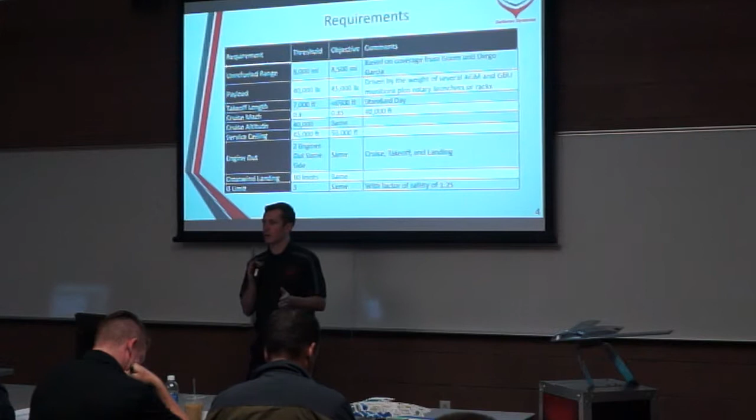I forgot to mention, the threshold values are our minimally compliant values, and the objective values are kind of goals that we wanted to achieve. So for unrefueled range, we wanted 8,000 miles, based on coverage from Guam and Diego Garcia. Payload of 40,000 pounds, driven by several of our payload packages and the rotary launchers and racks. The takeoff length of 7,000 feet was supposed to be comparable to the B-2, so we were operating from the same airfields as the B-2 currently operates from. The cruise Mach at 0.8, a cruise altitude of 40,000 feet, a service ceiling of 45,000 feet, and because we are a nuclear capable bomber, we need to handle 2 engines out on the same side and handle crosswind landing of 30 knots and a G limit of 3, and we imposed a factor of safety of 1.25.

We won't really be taking off from those 2 locations that much, so we plan to start off at Whiteman Air Force Base, similar to the B-2, and we would either refuel over Edwards Air Force Base or Hickam Air Force Base in Hawaii, then continue on to Andersen Air Force Base in Guam. From there we could also go to Diego Garcia, but either way we could cover most of our combat area from those 2 points.

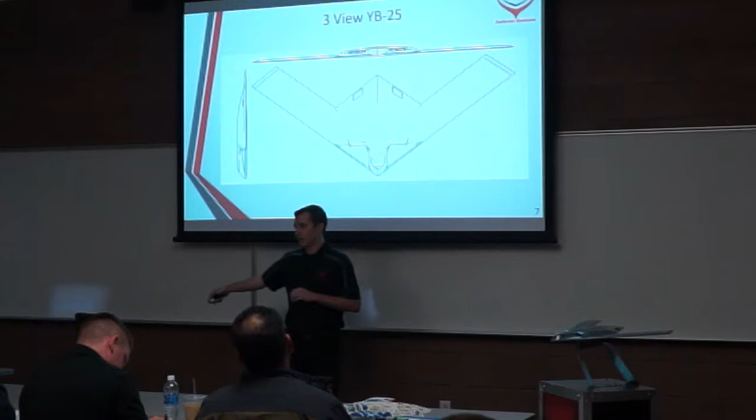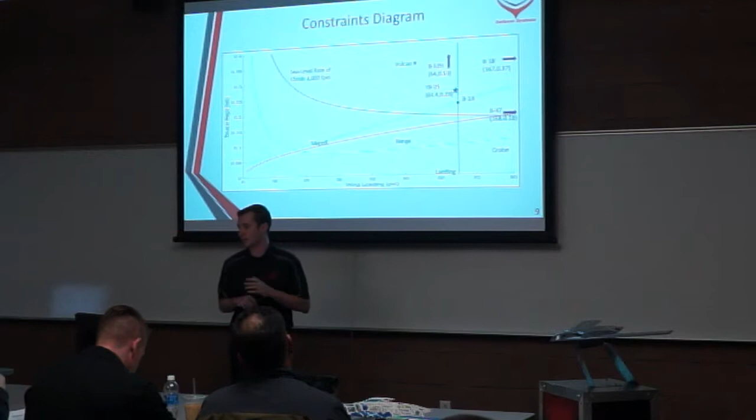This is our constraints diagram, showing how we entered the design phase. As you can see, we're the star there. We are not quite in the design space that we wanted, which was down here, the minimally compliant range. If we had to go through a couple more iterations, we would definitely drive that down. But right now, we're at a wing loading of 64 pounds per square foot and a thrust to weight of 0.28. This is pretty similar to the B-2 and in the same general area as the Vulcan and some of the other comparable aircraft.

And now I'll hand it off to Max for the internal arrangement.

Because we wanted a stealthy design, we don't have any tail structure. To compensate, we have 3 different control surfaces on each side: 2 elevons and a split drag rudder, plus flaps on the edges. For main structural members, the wings are all composites and the main structure is aluminum. We ran a keel down the center for conventional design.

We have 2 bomb bays similar to the B2. We have a ducted engine interface for stealth purposes, to hide the engine face. The cockpit holds 2 pilots, and we have directed energy weapons in case you run into any defenses. Of course you want to be stealthy, but just in case. We also carry other defensive countermeasures such as flares, and fuel takes up basically the rest of the volume.

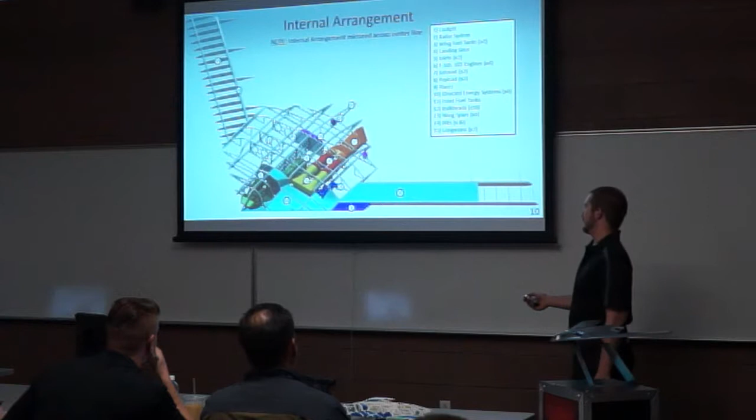And next I'll hand it off to John for low observables. Thanks, Max. So to improve the survivability and effectiveness of the aircraft in the danger zone, we wanted to incorporate some low observable qualities into our aircraft. We did a lot of research on this subject and came up with these rule of thumb ideas.

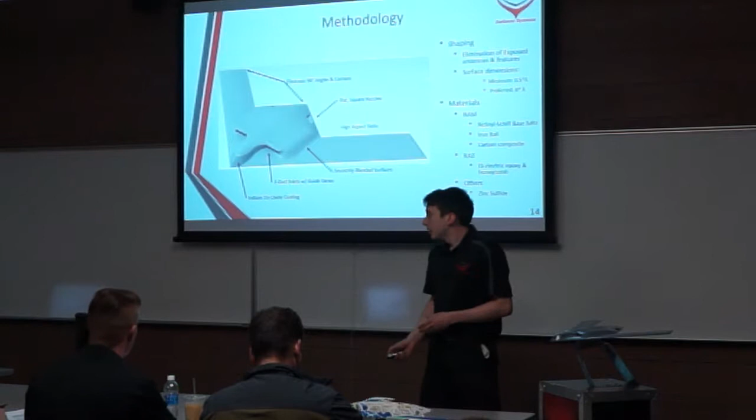We made sure to eliminate all 90-degree angles. We also wanted to provide a really smooth surface so we don't have any surface discontinuities. We masked the inlets to hide the compressor face, and applied a special coating over the cockpit windshield so radar wouldn't penetrate and reflect off the inside of the cockpit.

As far as materials go, we were looking at using RAM and RAS. The RAM would be incorporated into the paint, and the RAS would be part of the structure, modifying the leading edge of the aircraft.

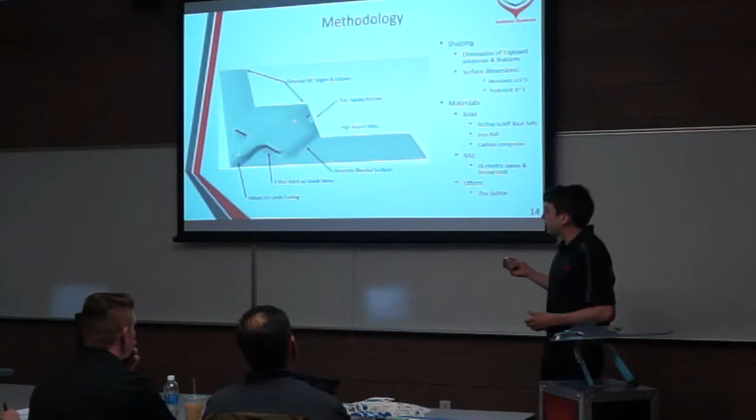For infrared detection, we're using a square nozzle in the back. This should encourage the mixing of hot exhaust air and cold atmospheric air. Additionally, we're looking at using zinc sulfide to force infrared radiation into a wavelength that doesn't transmit as well through the atmosphere.

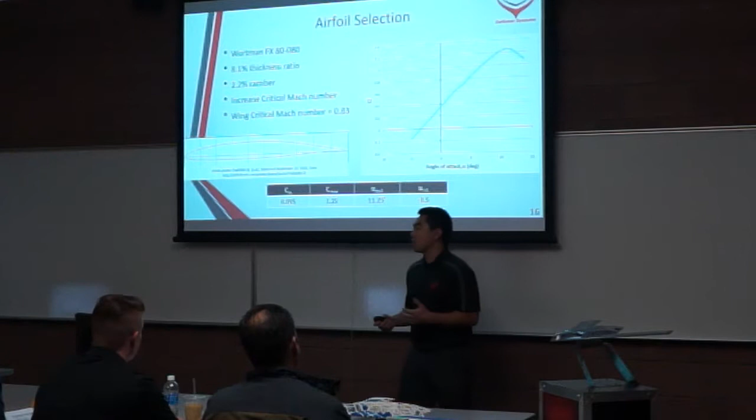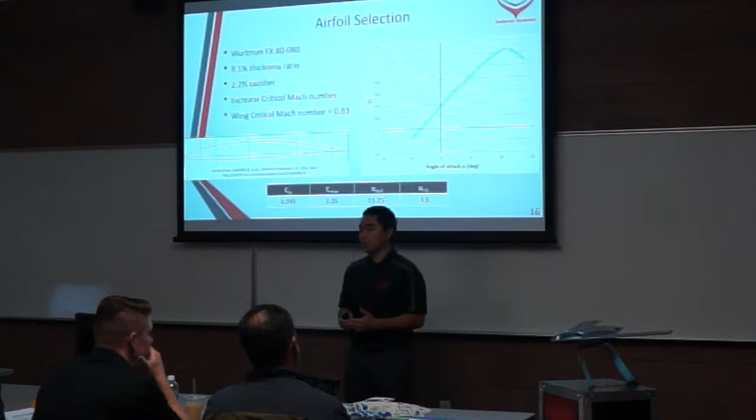And now I will hand it off to Michael to do aerodynamics. Thank you, John. The first thing for aerodynamics was we needed to pick an airfoil that could delay the critical Mach number over the wings as far as possible, as well as give good performance characteristics such as high CL and low CD, and have enough volume in the wings when transferred to 3-dimensional form in order to hold subsystems like fuel and electronics.

Overall, what came up was the Wortmann FX 80-080 airfoil, shown on your left here. This airfoil, with an 8.1% thickness ratio coupled with a 40-degree leading edge sweep, gives our wings a critical Mach number of 0.83. The 2-dimensional data here is derived from XFLR5, using 2-dimensional airfoil tools, and will be converted into 3-dimensional data using Brandt's methods.

Overall, with our clean configuration, the aircraft has a max CL of about 1.2 with a stall angle just above 11 degrees. When the flaps are deployed, the CL max jumps up to just below 1.6 and delays backward to under 10 degrees.

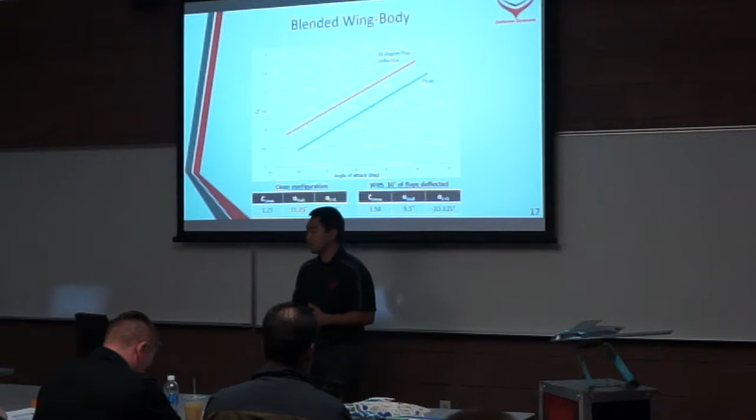In flight, we have sea level and cruise condition at 40,000 feet displayed here for our L over D. Overall, our max L over D for the YB-25 can achieve 23, but our cruise condition, a velocity of Mach 0.8 at 40,000 feet, gives an L over D of just under 23.

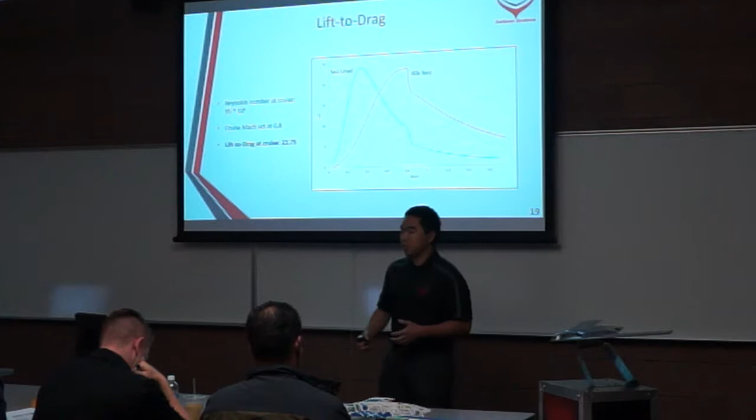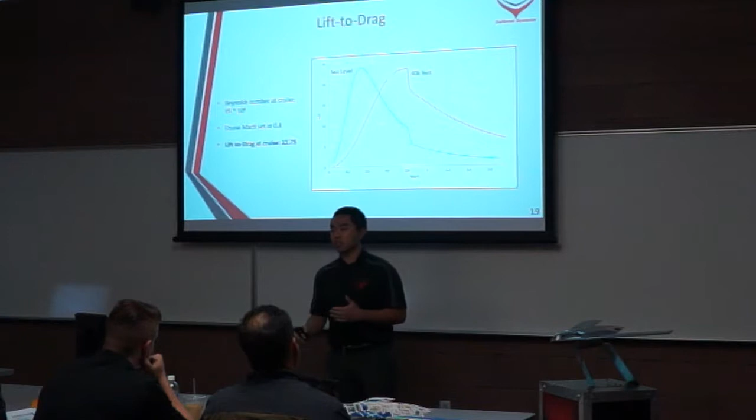I said before that the critical Mach number over the wings is Mach 0.83, but the thickness and length of the body reduces the critical Mach number over the body to just under 0.82. So we set the cruise velocity to 0.8, so that our aircraft does not get into the transonic region and experience any wave drag.

Our Reynolds number in flight is technically 95 million, and that will come into play later when our wind tunnel model is created and tested.

A bunch of us have never really done any blended wing body designs before in our college career, so we had to see if our numbers and assumptions actually made sense and could produce actual values.

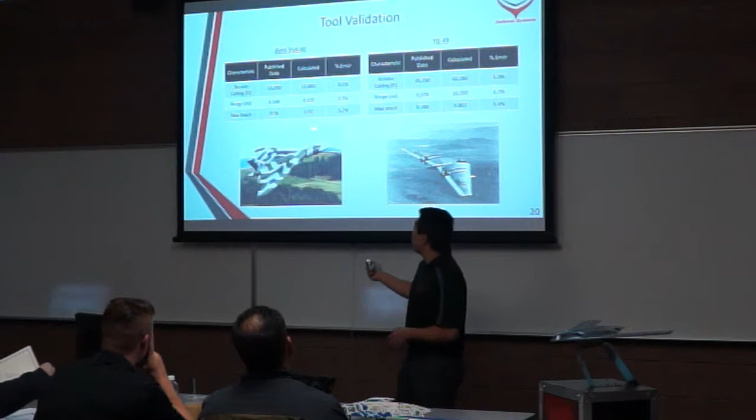So we compared our tool validation to the Avro Vulcan and the YB-49, two fairly blended wing body designs similar to our own, and that information is publicly available. As you can see from both the YB-49 and Avro Vulcan, for the main characteristics we have a max error of just above 5%, which is very acceptable for our calculations.

But first we need to start moving forward, so I'll give it to Josh for propulsion.

We decided to select our engines based on low TSFC and a thrust to weight ratio similar to our comparable aircraft. Using this data, we ended up with the engines shown here on the right.

We excluded high bypass ratio engines because of the S-ducted inlets. They can cause pressure variations that will cause the engine to tear itself apart, which is a bad thing.

So we ended up with these engines from the F-15, the F-16, the B-1, the B-2, the F-22, and the F-35. We considered adding afterburners, doing water injection, and taking off without full fuel weight because we are a fairly heavy aircraft.

But we ended up not really needing any of that because we reduced the weight down at the beginning of this semester.

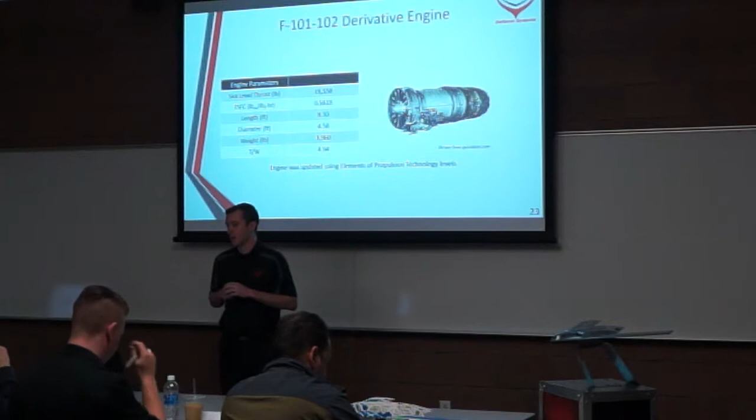So we ended up choosing the F-101, 102, a derivative of it. We updated it with current technology levels, and ended up with a sea level thrust of just under 20,000 pounds and a TSFC of 0.56.

This picture here does include the afterburner. This was removed for our use, and we estimated the new length and weight of the engine based on other engines that don't have afterburners.

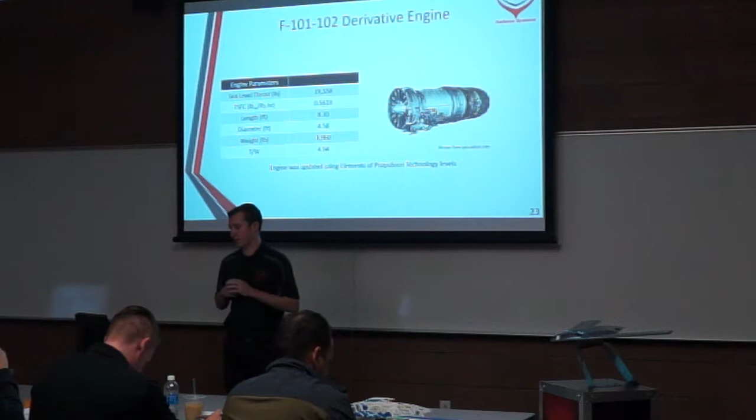From there, we sized the inlet and the diffuser. The inlet was sized using the PERF program, and it was found that we needed just under 10 square feet for our cruise condition, but we upped that to 10 square feet to handle the takeoff and landing conditions a little bit better.

The S-ducting of the diffuser hides the fan face, as John said before. We are going to implement turning vanes to limit the pooling and directionalize the flow a little bit better, and as an added benefit, those will hide the fan face even more, reducing our radar cross-section even more.

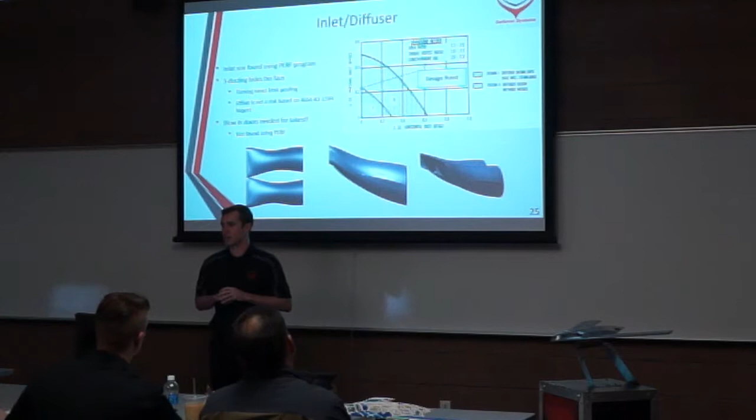The offset is not a risk based on the AIAA paper on diffuser design. As you can see, we're right on the edge of the well-established region of data, so we should be fine, and that's not a risk of the program that we expect to have.

We will need blow-in doors on takeoff, and these were sized using the PERF program as well.

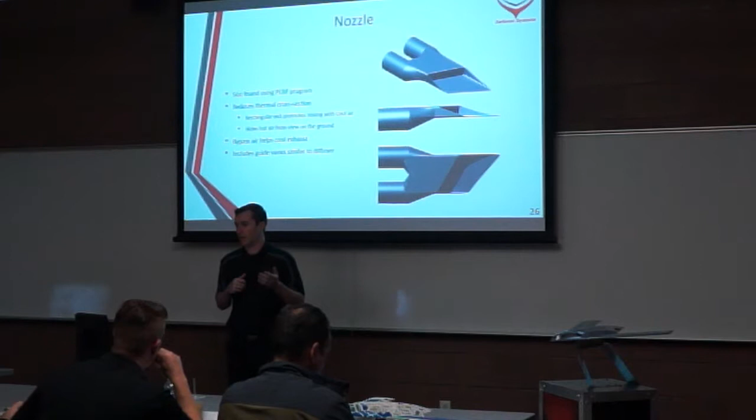The nozzle was again sized using the PERF program and was found to be about 7 square feet per side, or per engine, excuse me. They were designed to be similar to the B2 nozzles to reduce the thermal cross section. They were rectangular to promote mixing with the cool ambient air, and it's on top of the aircraft to hide the hot air from view from the ground. The bypass air from the engine also helps cool the exhaust, which is an added benefit of the turbofan engine. We are also including inlet guide vanes similar to the diffuser on the nozzle, just to help with the pressure recovery in the nozzle. And I will hand it back to Mike for performance.

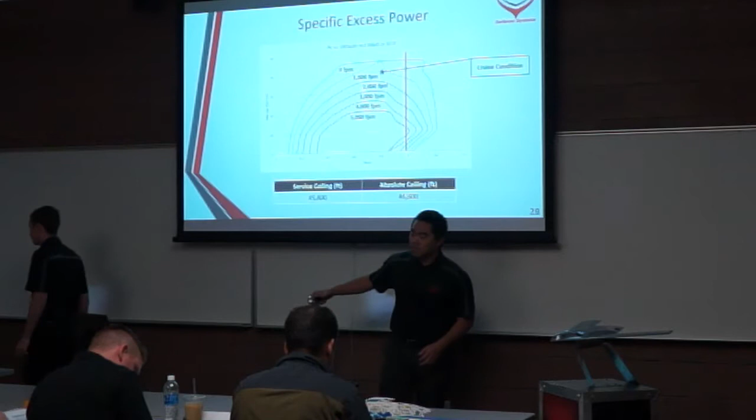Thank you, Josh. Here we have our Ps diagram starting at 5,000 feet per minute, going all the way up to 0 feet per minute. The star denotes our cruise condition there at 40,000 feet and just at Mach 0.8. Our service ceiling overall is just at 45,000 feet, and our absolute ceiling is at 46,600 feet. Our Ps lines do go above Mach 1 as shown there, but when doing these calculations, we did not put into consideration the Q limit and the max forward speed that the aircraft could achieve, which is why the red line is there. That shows the maximum velocity at cruise condition of 40,000 feet.

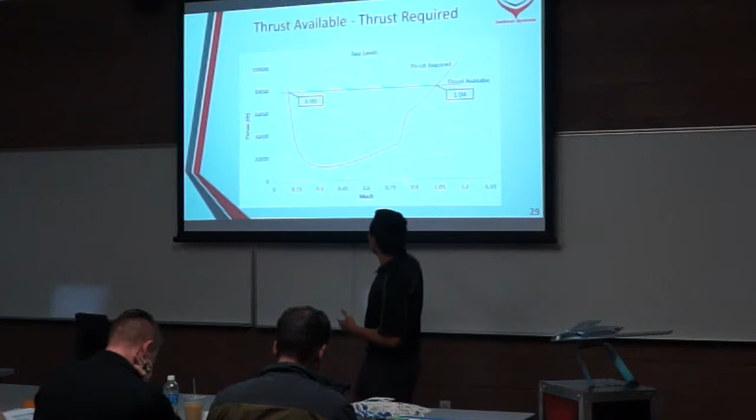Again, with the thrust available, thrust required here, both callouts on the left and the right side here show the minimum velocity and maximum velocity at the current altitude. This one is currently at sea level, and the massive rise here in the thrust required is due to the wave drag over the body.

It should also be noted from all those graphs, the airplane was at full fuel and full payload.

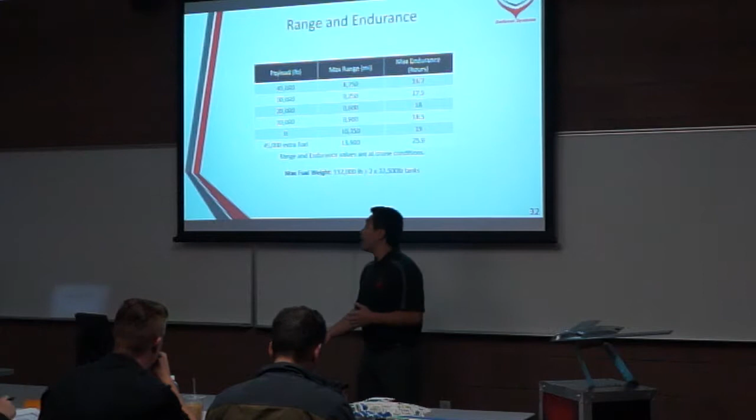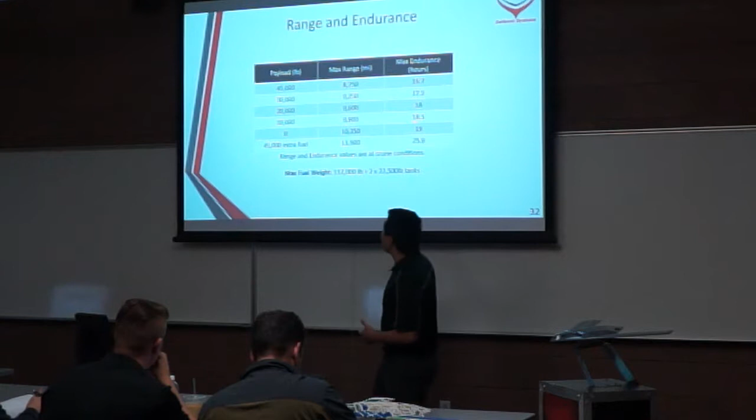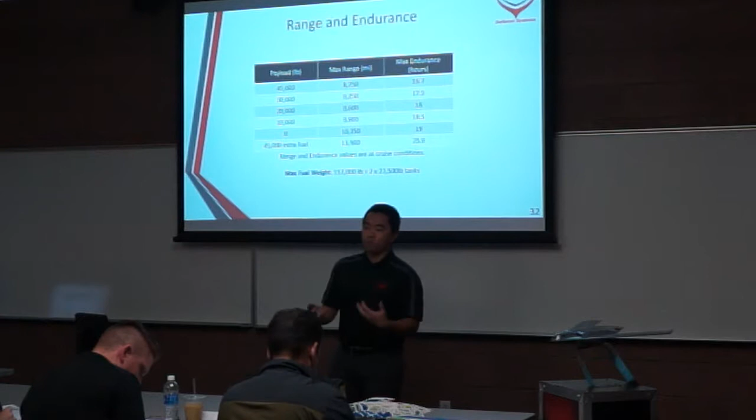So here we have our range and endurance diagrams. There are different payload options here that we have. Of course, as mentioned before, our aircraft can hold a maximum payload of 45,000 pounds. So with that payload and our max fuel, we can have a max range of just under 9,000 miles and an endurance of just below 17 hours. In case our aircraft wants to do more of a reconnaissance or electronic warfare, our payload of 0 in just the bomb bay compartment, our max range goes up to above 10,000 miles and a max endurance of 19 hours. But if there are no bombs in there, we can put external fuel tanks or additional fuel tanks, equaling out the max payload of 45,000 pounds. With that, ultimately, with the extra fuel, we have a max range of just under 14,000 miles and an endurance of under 26 hours. Our aircraft can hold a max fuel weight of 112,000 pounds without the extra fuel tank.

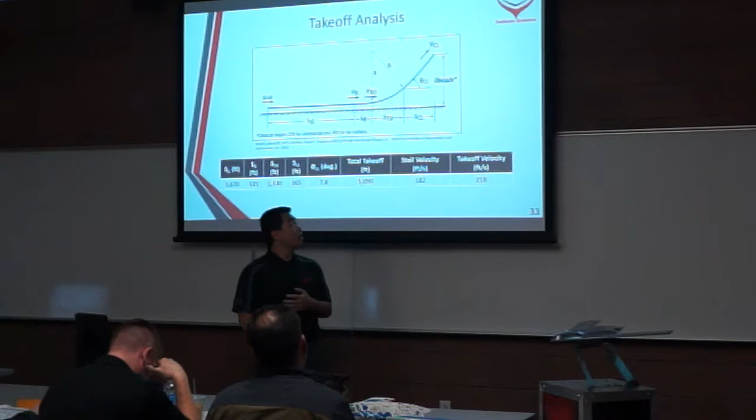So we have to get off the ground first. Using Nicolai's methods, we have our takeoff analysis. He breaks it down into 4 different distances: the ground roll, the transition, the rotation, and the clearance. We are using the standard 50-foot obstacle at the end of the runway for military aircraft, so that is taken into account. They are broken down above me here for their different distances, but overall, on a dry runway with full fuel and full payload, we do have a takeoff distance of just under 5,900 feet, and that is compliant with our total takeoff distance of 6,500.

With full payload and full fuel, our stall velocity goes up to about 182 feet per second, which is just around 110 knots. But using the standard 1.2 factor for takeoff velocity, it brings us up to 220 feet per second, which brings us to about 130 knots.

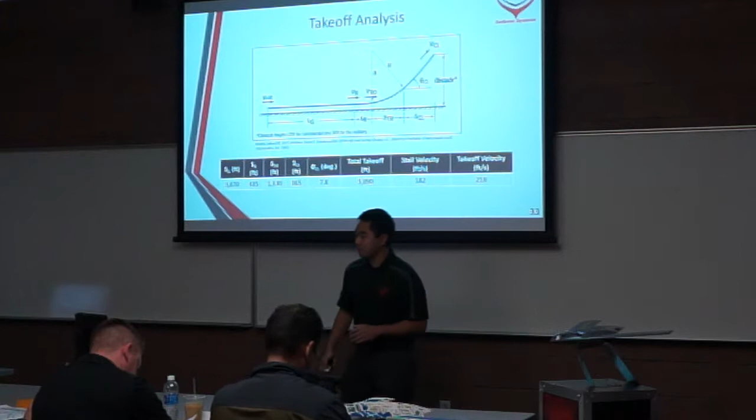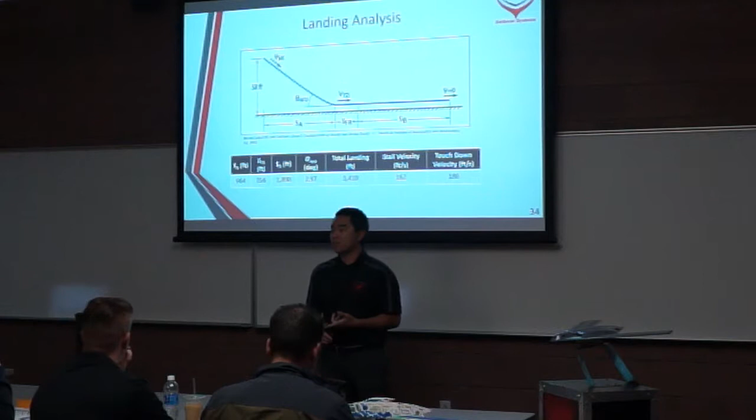So after the mission is over, we have to land, hopefully in one piece. Again, using Nicolai's method, he breaks it up into 3 different distances: the air distance, the free roll, and the braking distance. Once again, they're broken down for you individually at the bottom, but overall, our aircraft has an approach angle of just under 3 degrees and a total landing of 3,400 feet. This is also compliant with our 3,500 feet landing distance.

Nicolai does assume that the aircraft is at half fuel weight, just in case the mission is aborted mid-flight, or that the target area is not at our maximum range. So that is what these calculations are done at. With the half fuel, the stall velocity of the plane with a max payload, in case we didn't drop any, is 162 feet per second, which is about 95 knots. But with the standard 1.15 factor of safety for touchdown velocity, that brings us up to 186 feet per second, about 111 knots.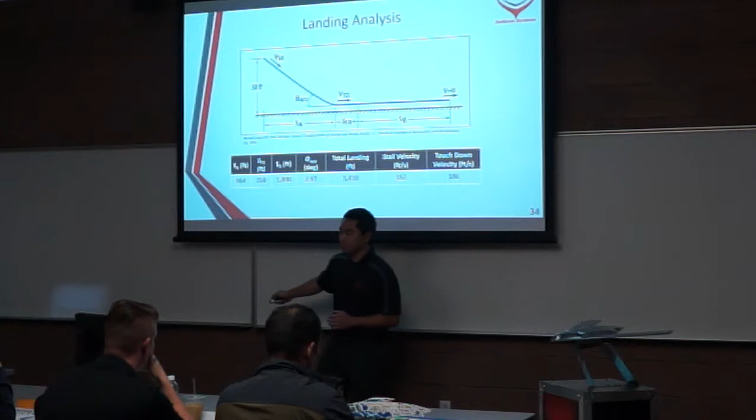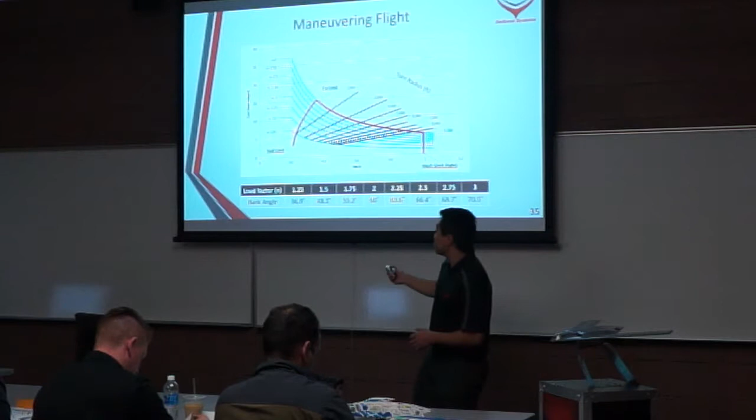This is our maneuvering diagram. The red box here shows what our aircraft is capable of. The top red line is the 3G limit that our aircraft can pull. The right line is the maximum Mach number at cruise of just under Mach 1, 0.98, as mentioned before. And the left is the stall limit, where our aircraft is going too slow with max fuel and max payload, and will begin to fall out of the sky.

But first, to hold all those weights, hand it off to Rhiannon for structures. Thank you, Mike.

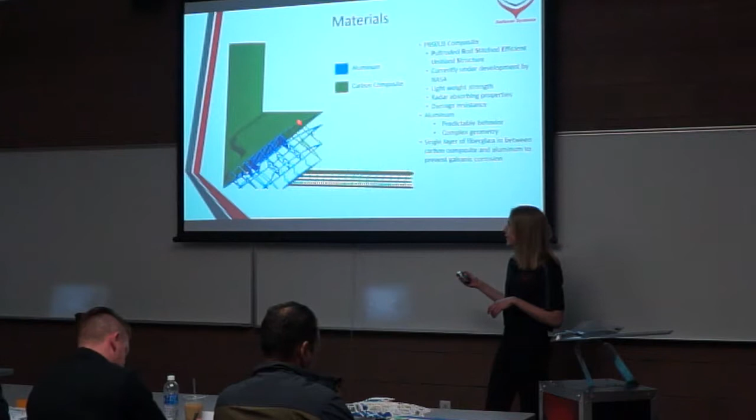For the materials of our aircraft, we chose to use aluminum and carbon composite. Our carbon composite is called the PRSEUS composite and is currently under development by NASA, at about TRL level 6. We chose this due to its lightweight and high strength properties, and radar absorbing properties, especially for the skin. Since the PRSEUS composite is a stitched composite with damage resistant properties, we selected aluminum due to its predictable behavior. Since the body of our aircraft is more complex, carbon wouldn't necessarily be the best choice. In between the aluminum and the carbon composite, we have a single layer of fiberglass to avoid galvanic corrosion.

For our wing design, we have 2 I-beam spars located at 15 and 60% apart. We have 16 ribs located throughout the span of our wing, spaced for control surface sizing. I placed 6 stringers throughout the chord of our wing to reduce our wingtip deflection and apply a lift distribution with 3G loading at a 1.25 factor of safety.

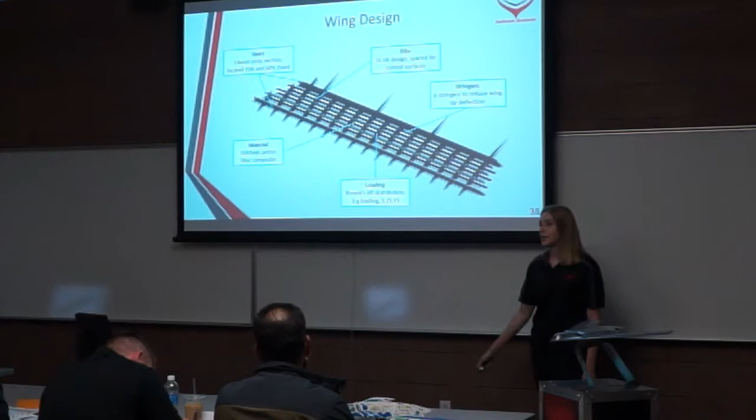For our finite element analysis, I'll start with the boundary condition. I applied a fixed boundary condition at the root and applied Schrenk's lift distribution across the span of the wing at each spar location, along each rib location along the spars of the wing. We achieved a stress singularity in the middle of the wing due to the loading and geometry, but since this is so far away from the root of the wing, which is the actual area of interest, it can be ignored. The max stress achieved at the root of the wing is 161 KSI, which is below our allowable stress and yields a margin of safety of about 8.7%.

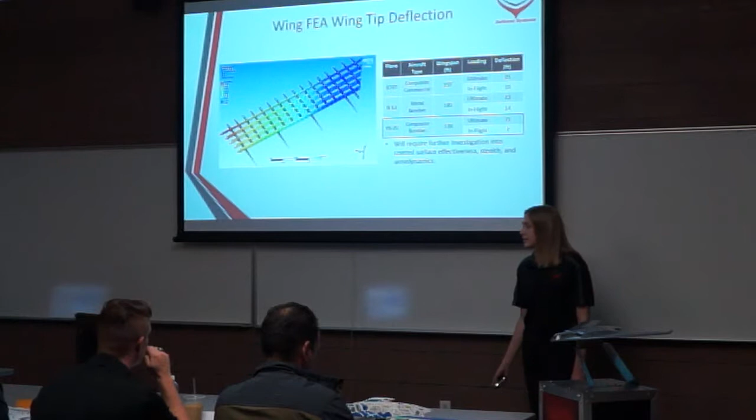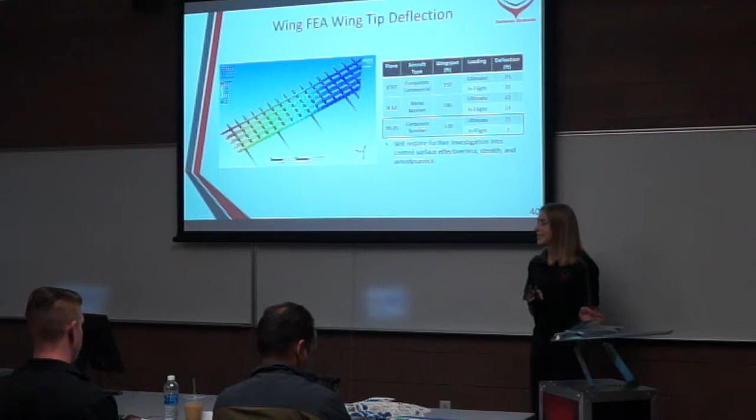For our wingtip deflection, during ultimate loading, our wingtips deflect about 21 feet, and in flight about 7 feet, which sounds like a lot, but compared to commercial composite aircraft and other metal bombers, this is similar. However, this will require a lot more investigation to see how this affects our stealth characteristics, our control surface effectiveness, and aerodynamic characteristics. So that's a topic for further investigation.

For our body design, we also analyzed for 3G loading configurations. Our frames are spaced for our bomb bay and our engine placement. The bomb bay within the frame is 6 feet by 6 feet and 21 feet long, and can hold 45,000 pounds. We performed gust loading analysis and determined that at lower altitudes it does not affect our flight envelope, and at our 40,000 foot altitude it doesn't exceed our 3G design limit, so gust loading wasn't a factor in our analysis.

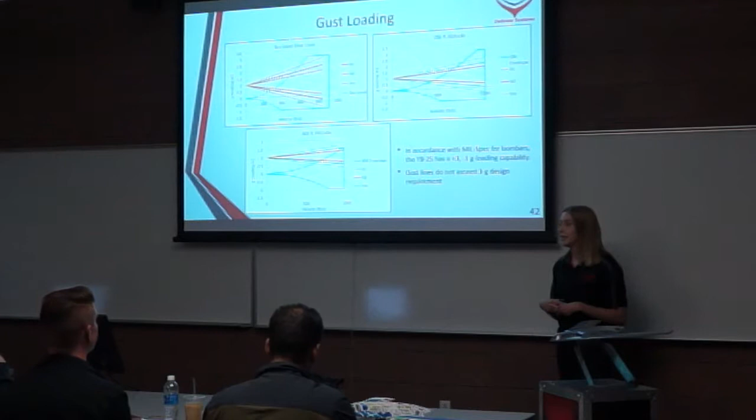And now I'll pass it out to Kate for subsystem or subscale model. Thank you, Rhiannon.

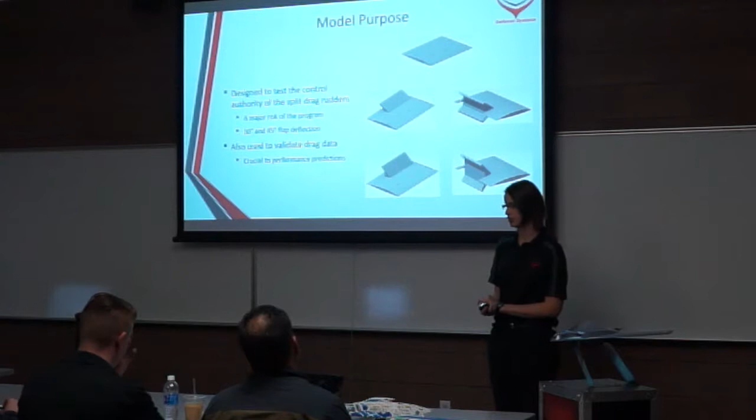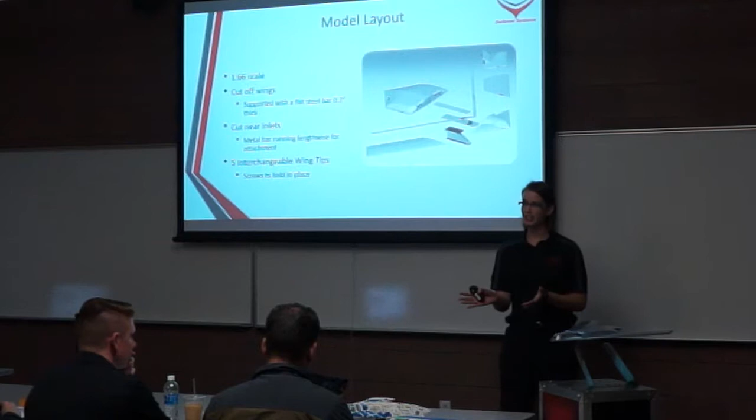In order to test the lift, drag, and yaw control on our aircraft, we designed a subscale model that had interchangeable wingtips so that we could test multiple flap configurations. We had a clean wingtip, and we tested both upper flap deflection and upper and lower flap deflection at 30 degrees and 45 degrees. Our model was 1:66 scale, but it had to be cut into pieces in order to be 3D printed. We cut off the wings and cut one wing in half so that it would be interchangeable. We also had to cut the body into 2 pieces in front of the inlet in order to fit the requirements for 3D printing size.

The model was reassembled using steel beams in order to make it structurally sound so that it can stand up to the forces experienced in the wind tunnel. The wingtips were screwed on so that they could be removed easily during the test. The other pieces were all glued on so that they would stay together.

And now on to John for wind tunnel testing. Thank you, Kate.

So as was mentioned before, we looked at 2 different subjects for our wind tunnel testing. The main subject was actually the functionality of that split drag rudder, just because there's not a lot of data out there regarding how they work or how effective they are. We were concerned not only with the yaw moment that would be produced, but also with the moment coupling produced in the roll direction specifically.

The performance data was collected as well, we'll go over that later. For the controllability, we were primarily concerned about landing in the 30-knot crosswind, just because we didn't have a lot of data about the yaw controllability of our aircraft.

We did the math, and that came out to about 8 degrees of beta in the wind tunnel. So we evaluated at the landing, which is 3 degrees, and at takeoff, which is 8 degrees, as well as a 0 degree angle of attack.

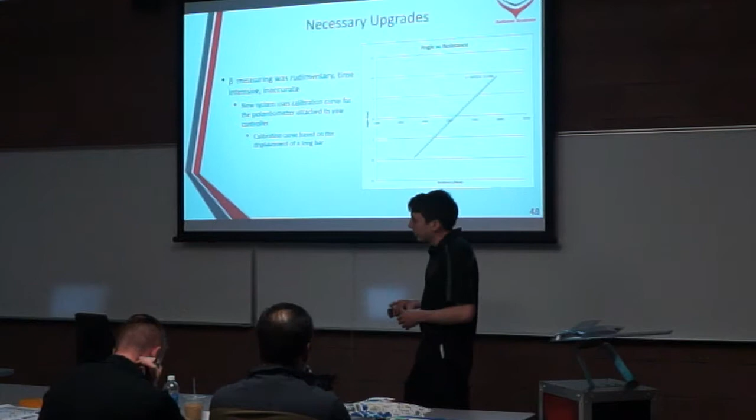Before we could start testing, we actually had to develop a calibration curve for the potentiometer attached to the yaw controller in the wind tunnel. So we took a bunch of data points for a bunch of displacements of a long bar placed in the wind tunnel and developed this calibration curve. We used this to set our yaw angle more accurately than what had been done in the past.

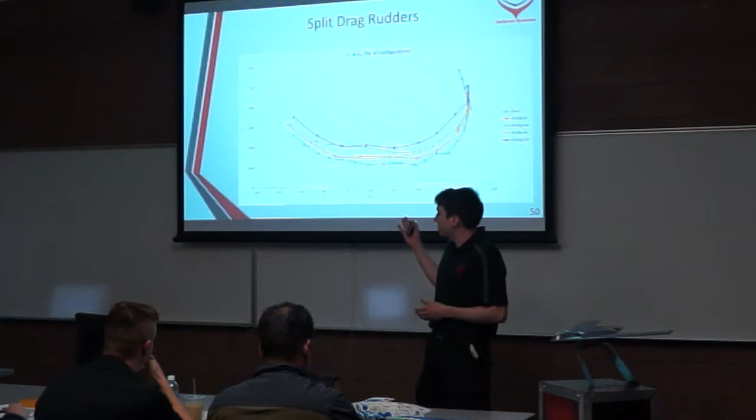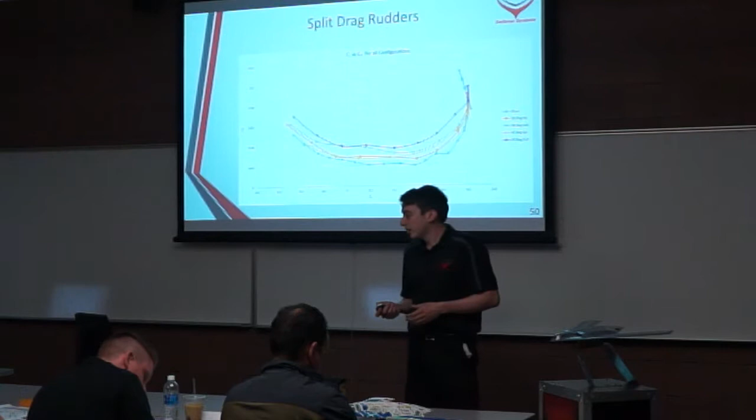For the controllability stuff, we looked at first the drag that was produced by deploying these flaps, just to see what kind of drag increase we saw throughout all of our testing. Obviously it worked, we did see a drag increase, with the 45-degree full deflection showing the most increased drag.

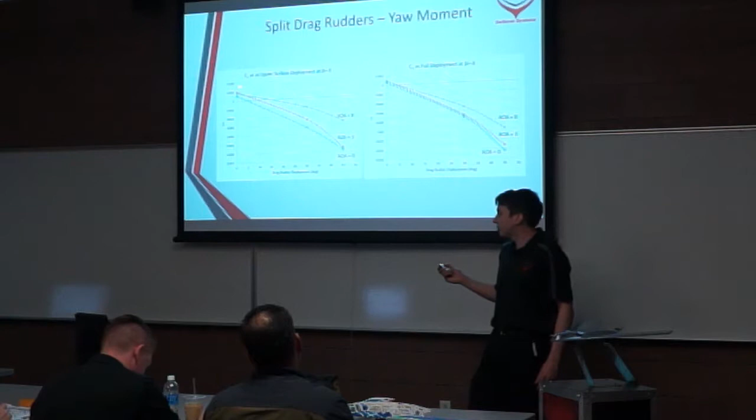For the moments, this is just the worst case scenario for us. So flaps were deployed on the left-hand side, and this is the beta of -8, so the right wing was forward. We would expect to see a decrease in efficiency on the left wing, but we're still generating a negative yawing moment. These trend lines here aren't so much trend lines as they are to guide kind of your eye, so you can see data points here, here, here. But at that negative yawing moment, we would have expected to see kind of a positive yaw we can do with no control surfaces here. But since we are generating a negative yawing moment, we are controllable.

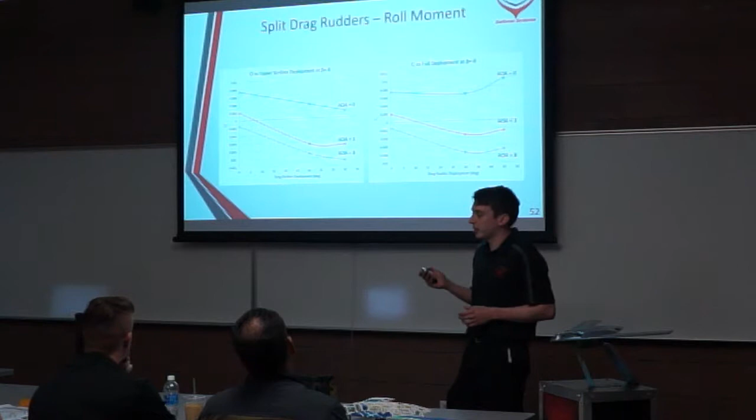For the moment coupling, it's kind of, again, unpredictable. We do see that coupling, we did expect to see some coupling, but there's really no way for us to model this. We need to do a lot more testing to validate what those control surfaces are doing exactly, especially at a high sweep angle.

And I will hand it off to Brian to talk more about stability control.

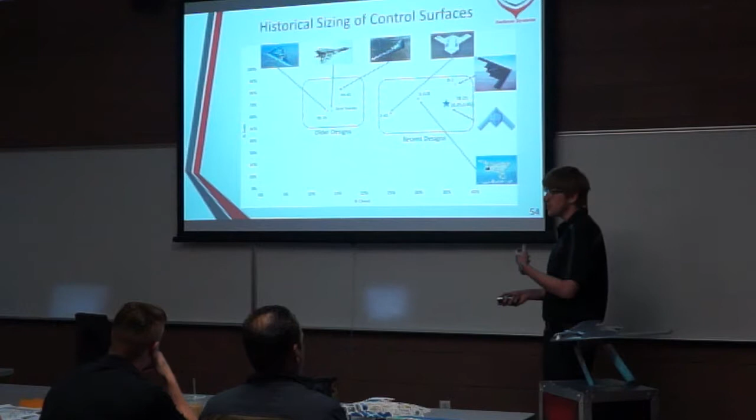Thank you, John. So at the beginning of our stability control program, we started sizing our control surfaces based off of historical data. As you can see, there are 2 clusters of data points for our comparable aircraft. There are the older designs, the legacy designs, and then there's more recent designs like the B2 and the X-47B. As you can see, our design of 35% chord and 65% span is around the center of the design range, and thus our control surfaces were sized.

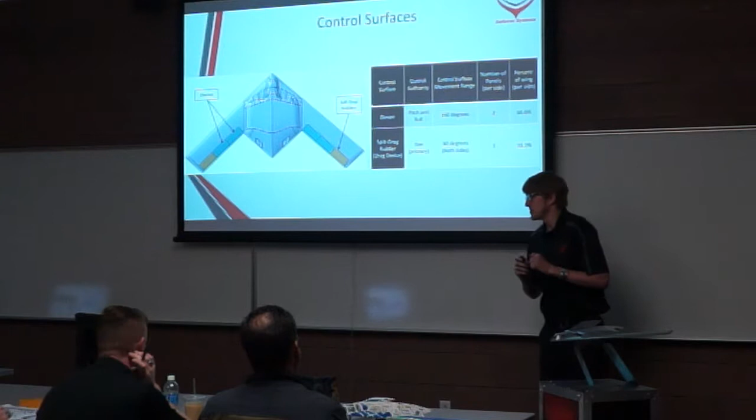We have 2 types of control surfaces, elevons and split drag rudders. The elevons on one side comprise about 66.6% of that side, and the split drag rudders 33%. All the control surfaces can deflect to a maximum angle of 60 degrees in both directions. And this is a visual example of our control surfaces.

So, as you can see, split drag rudders open. They can open independently between the sides, they can open independently on the same side and rotate. And then for our elevons, similar thing, both can deflect. They can deflect independently across the sides and on the same side for maximum controllability.

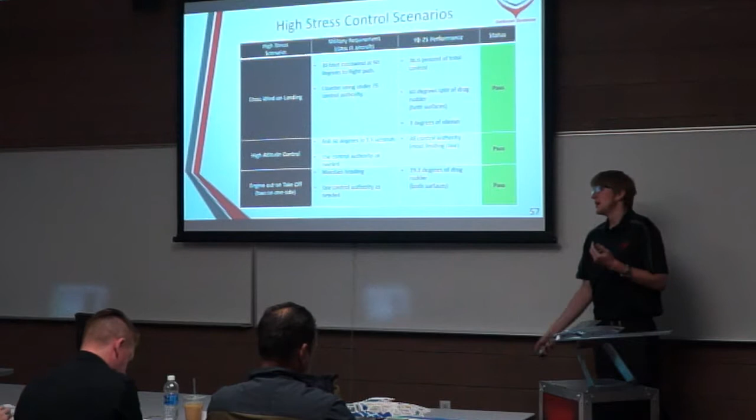This brings us to our high stress case scenarios. There are 3 scenarios of concern for us: crosswinds on landing, high altitude, and engine out on takeoff and landing. The YB-25 can handle all of these.

For a crosswind on landing, we only need 36.6% of our control authority. And for our high altitude control, this was the most limiting case.

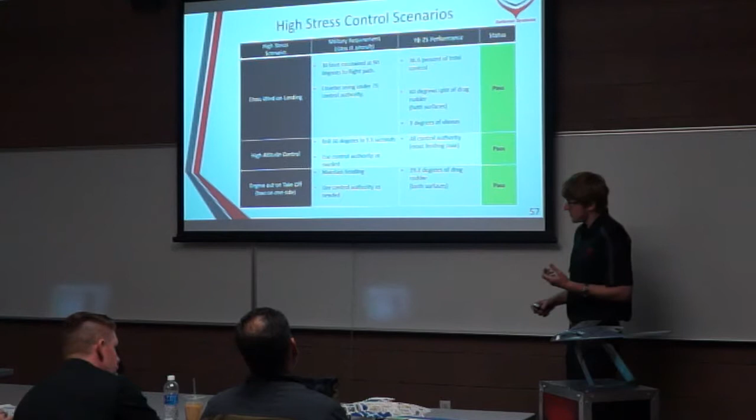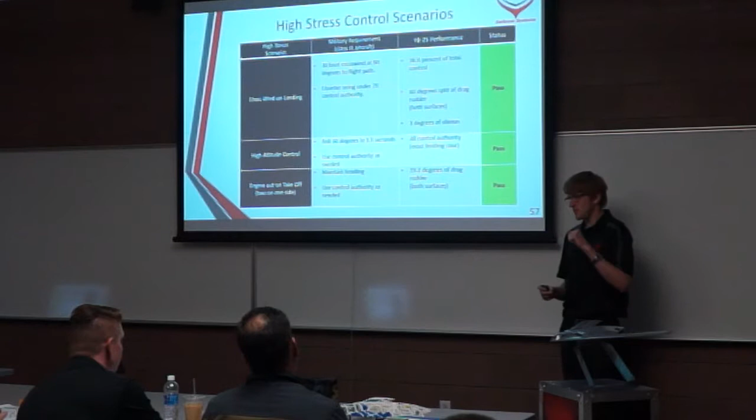When we deflected all of our control surfaces, we were able to adhere to the mil-spec requirement of rolling 30 degrees within 1.5 seconds. Because we are minimally compliant with this, our control surface sizing is minimally compliant and is the smallest size, both in terms of area coverage on the wings and in terms of deflectability, how far they can go up and down. And for the engine out on takeoff, we just need 29.2 degrees of split drag rudder in order to counter.

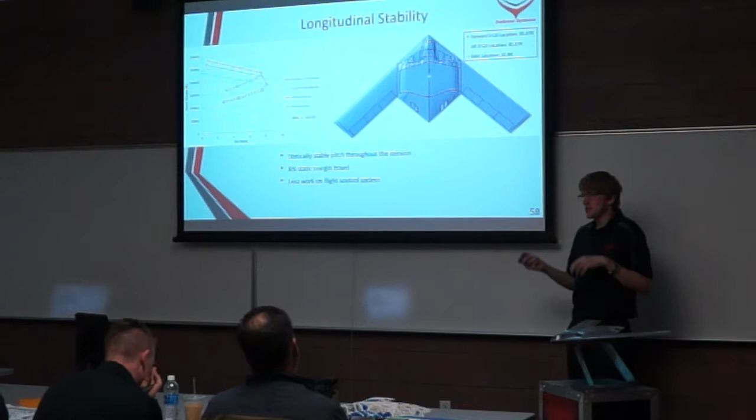In terms of our longitudinal stability, our static margin as percent MAC, we never crossed 0%. So we are statically stable in pitch throughout the entire mission under any single type of payload configuration we choose to carry. In total, we have about an 8% static margin shift, as you can see by this image, where the blue is the most forward and the green is the most aft.

Because we only shift about 8%, this means there is less work that has to be done on our flight control computer in order to effectively operate the aircraft.

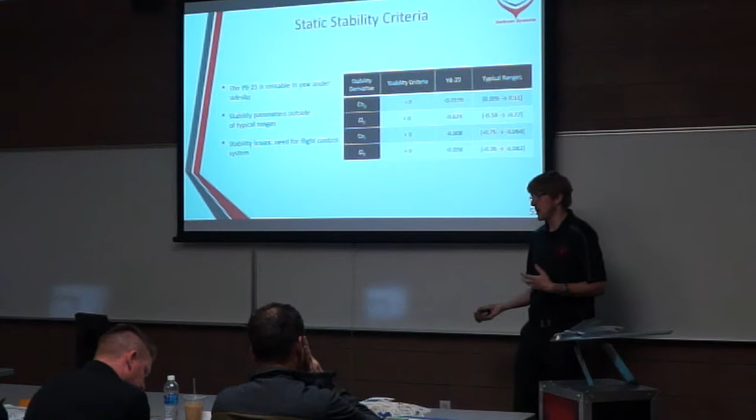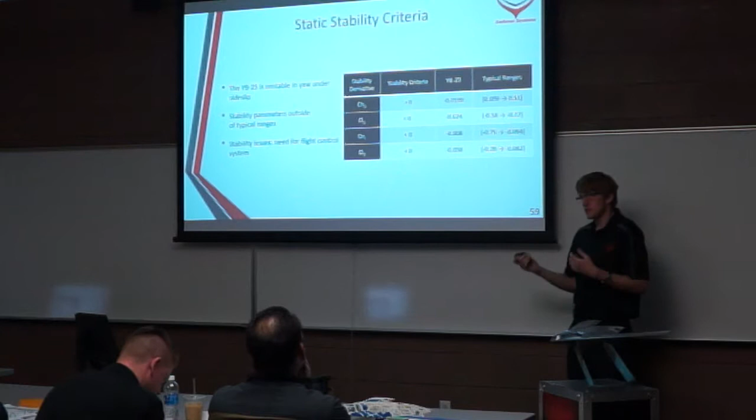In terms of our static stability criteria, these are our analytical solutions. Using our analytical approach from the US Air Force's Digital DATCOM, with a few modifications due to our tailless design, we found that the YB-25 is unstable in yaw due to side slip. A lot of the other characteristic parameters are outside of the typical range you would expect for conventional aircraft, but this is understandable because we are not using a conventional design.

However, this does show that our aircraft has a need for a flight control system. So we designed one. It's quadruplex redundant due to our nuclear capabilities.

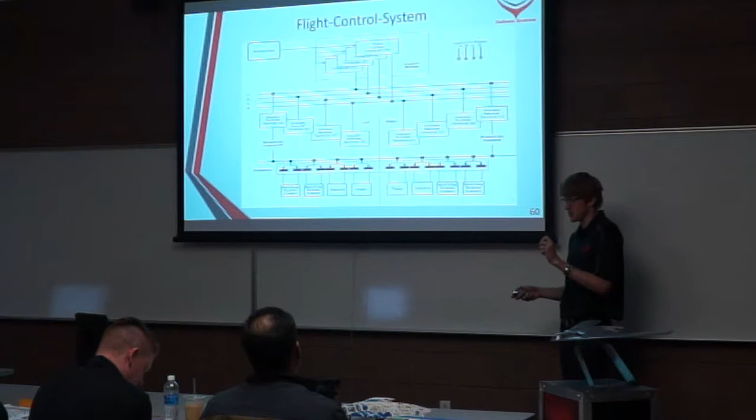To do this, we need a set of flight sensors in order to denote crucial information to our flight computers. We will be using a series of inertial navigation units, placed under the cockpit in the cabin, and a series of static ports, placed on the nose. The static ports will be very small so they don't affect our RCS by a significant portion.

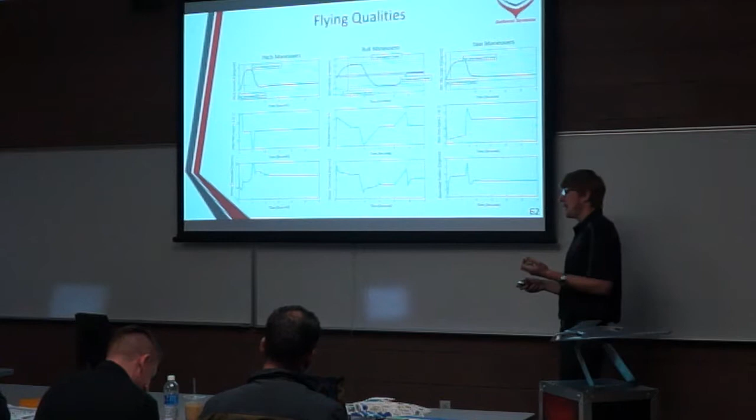Using this flight system and our analytical solution with the US Air Force's DATCOM, we were able to run our numbers through a 6 degrees of freedom simulation, simulating what our aircraft would actually do. It was found that we were able to find a control solution that would give us level 1 flying qualities for our class of aircraft.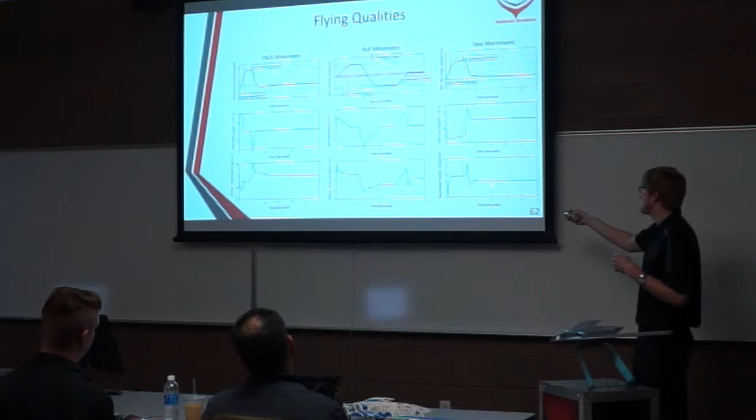As you can see, the pilot need only give simple stick commands in order to produce nice, clean, modified results for our control surfaces, producing good responses.

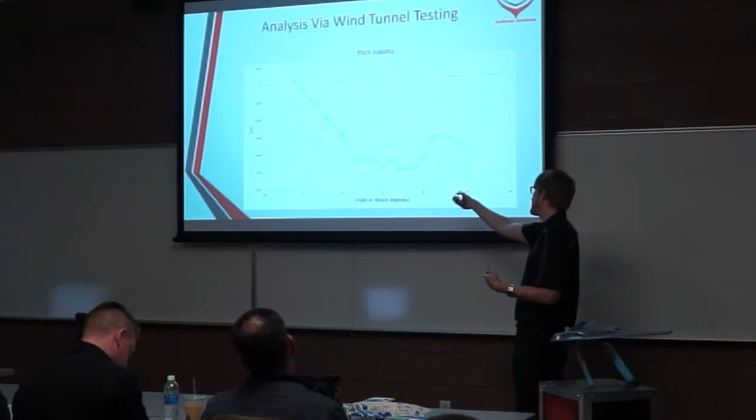Now, the takeaways in terms of stability and control from our wind tunnel testing: CM alpha, from our analytical criteria, needs to be negative in order for us to be stable. As you can see, we do have this nice negative slope from about -5 degrees angle of attack up until about 9, where we become unstable in the stall region.

Now, we would never reach this particular point in our flight envelope or flight patterns, because this is around the point where our engines would blank due to flow separation. So we are stable under all flight conditions.

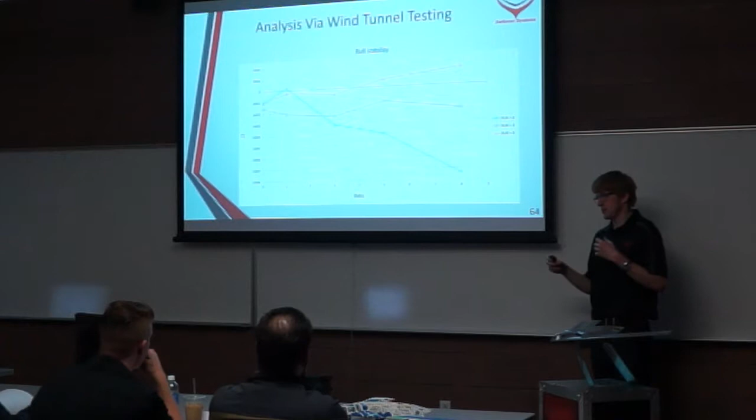In terms of roll stability, however, the wind tunnel results were a little more ambiguous. At an angle of attack of about 0 degrees, we get that same nice negative CL beta curve, but at higher angles of attack, the results can be more ambiguous, showing marginally stable or even unstable results. But these were so skewed and ambiguous that we really need more investigation for this project to move forward.

And finally, in terms of yaw stability, we learned that we are stable with a nice negative slope under all flight conditions, even when we do not have any split drag rudder deployed, which was a relief for us.

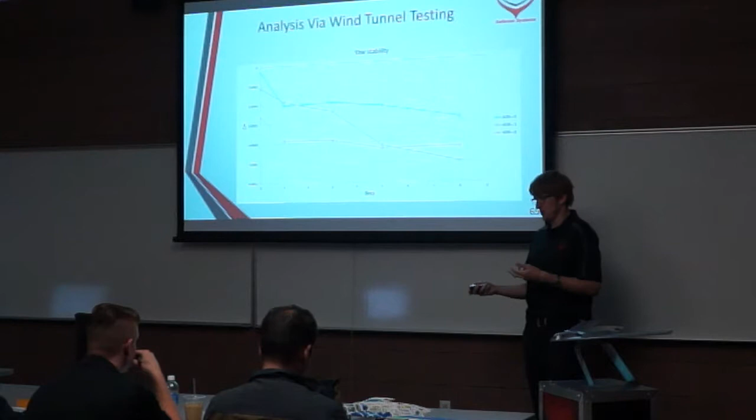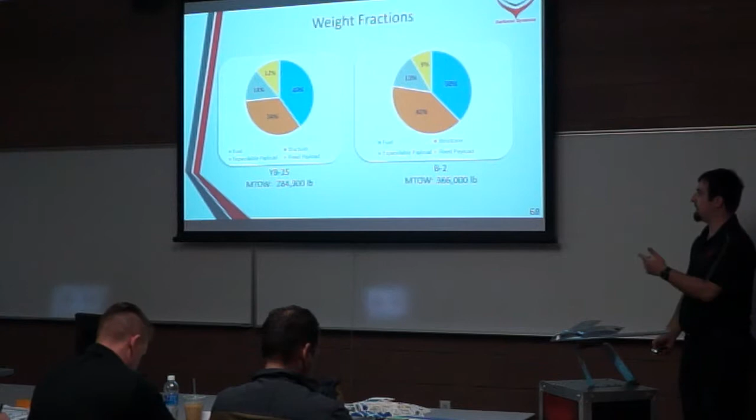We compared our weight fractions against those of the B-2 because it was our closest comparable. As expected, given our longer range mission over the B-2, we have a higher fuel fraction and a lower structure fraction. What's interesting is our payload fractions for both expendable and fixed payload increase, largely due to the overall decrease in weight of our aircraft, as well as the addition of directed energy weapons for our defensive capabilities.

I will now continue on to talk about systems and crew, starting with the landing gear. For our landing gear, we decided on a 90-10 loading ratio. This was to pull as much weight off of our nose gear, which was experiencing extreme loads in an emergency braking scenario. Our nose gear location was also our first one set.

It was set at 12 feet back from the nose of the aircraft because it was our closest structural member that could support the loads experienced during an emergency brake. Using the ratio, this set our main gear at 37.8 feet back from the nose. Due to the presence of our bomb bay and engines inboard of our main landing gear, our landing gear was set out at 21.3 feet off the center line of the aircraft.

We selected a 4-tire layout for our main gear. This was because it allowed us to reduce the size of our tires overall, which reduced the size of our landing gear bays, which allowed us to not add any bumps or disruptions to the smooth contours of the aircraft and preserve the stealth capabilities.

Our nose gear was kept with the 2-wheel configuration, which allows for good steering capabilities, and ended up at 40 by 50.5 inch diameter tires.

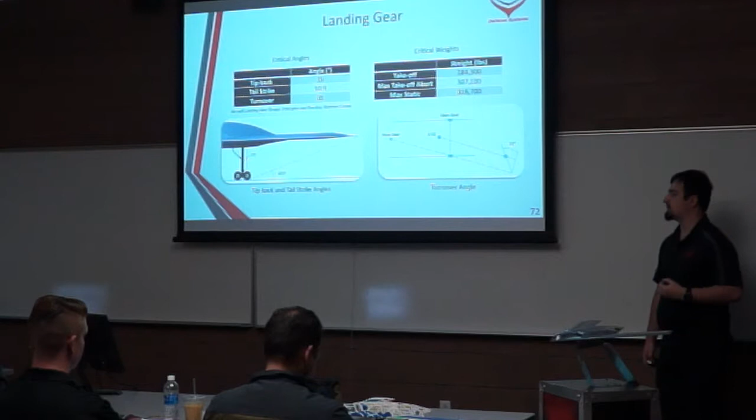307,100 pounds and still perform a takeoff abort before experiencing tire failure, and we can sustain a max static loading of 316,700 pounds before tire failure as well.

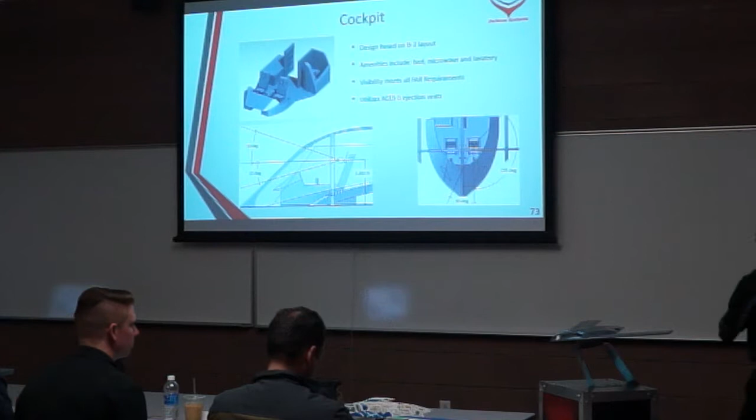I will now pass it over to Van Pollard for our cockpit and defense systems. Thank you, Nick. So our cockpit is designed to accommodate both a pilot and a co-pilot. It's largely based on that used within the B-2, which is our closest mission-based comparable. Due to the very long mission durations of our aircraft, pilot amenities include a lavatory, bed, and microwave.

Roskam outlines several FAR requirements for pilot visibility: a 20-degree field of view from level sight up, a 15-degree field of view from level sight down, 135 degrees from the center line outboard of the aircraft, and a 30-degree field of view from center line inboard of the aircraft. These images show that we are in full compliance with all regulations outlined by Roskam.

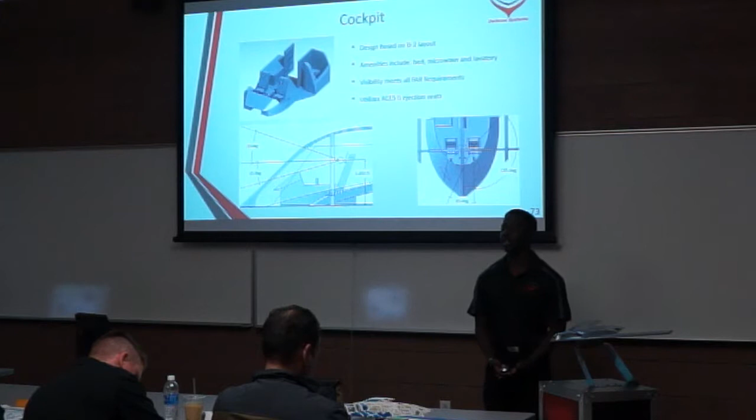In addition, our cockpit utilizes the ACES 5 ejection seats. These seats are operable from speeds anywhere from 0 to 1,000 feet per second and at altitudes up to 60,000 feet. This image shows our egress process.

Our aircraft utilizes 2 main radar systems, the first being our primary, which is based off the AN/APQ-181. This is a low probability of intercept radar and is also ground compatible.

The second radar system is the AN/ALR-69V. This is the radar warning receiver whose receptors are spread out across the surface of our aircraft, which also produces favorable results for our low observability.

This system is ECM capable and is the one currently used aboard the C-130. So the main design parameter of our aircraft is stealth. The idea is not to be seen. However, we'd be remiss if we did not put in some defensive measures.

Our aircraft comes with two primary systems, the first of which being the High Energy Liquid Laser Area Defense System, or HELLADS, designed by General Atomics.

These directed energy systems utilize a 150 kilowatt laser to execute a soft kill on any radar-guided ordnance targeted at our aircraft. We have 4 modules spread out across the aircraft, each equipped with their own lithium-ion battery that can be recharged in flight with excess energy from the generators.

In the event that we are locked onto by an infrared seeking radar, the aircraft is equipped with 508 MJU-23B flares. These flares are of the same class used aboard the B-1 Lancer currently and are stored in 2 separate compartments behind each of the bomb bays.

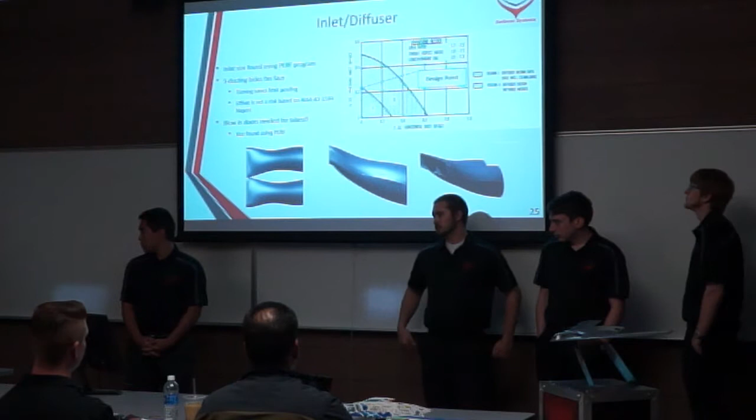One other thing, stability control. Let's see, page 63. Wait, no, sorry. There was a chart that showed the stability criteria - actually, yeah, this was one too.

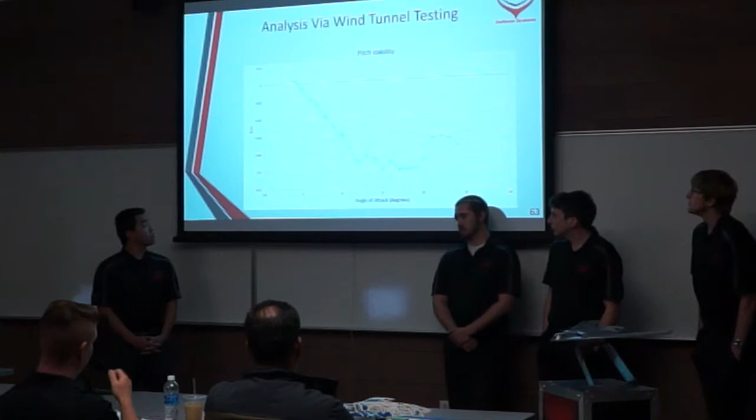I think the statement you made was that you're good out to 90 degrees angle of attack for pitch stability. Yes. I would think very carefully about that statement beyond about 2 degrees angle of attack, because you see it goes positive CM alpha between 2 and 6, and then it goes negative again, and then positive, and then negative. So I'm not sure - I think you need to think very carefully about that statement that you're good beyond 2 degrees angle of attack.

The other data that we had, that we didn't have room to publish - if I had taken an average of all of them and put the data all together, it would have shown it. So I just chose not to do that. That's why.

Thank you, well done. Yeah, I thought it was overall really good.

There was one nitpicky thing I found that happened throughout the whole presentation - just attention to detail on how you mark your charts. So here you have angle of attack, you spelled out degrees, and then you also put a deg. You do the same thing with your C, the M next to it, or its subscripts - just little things like that. You want to be looking through that. I know it's nitpicky, but you want to watch for things like that. Other than that, nothing that bad throughout the whole thing.

When you guys were talking about using perf, you might want to mention what that is, because I know what it is since I used it about 2 years ago, but there are people that won't know what it is.

On slide 32, you mentioned something about EW with zero payload. I'm not sure that's necessary unless you actually have a mission for electronic warfare. Technically, we could. We haven't outlined one yet, but being a versatile platform, we could implement that. It's something the B2 can do, and we haven't looked a whole lot into it, and there's not a lot out there available. So we don't have one set up right now, but it's a possibility.

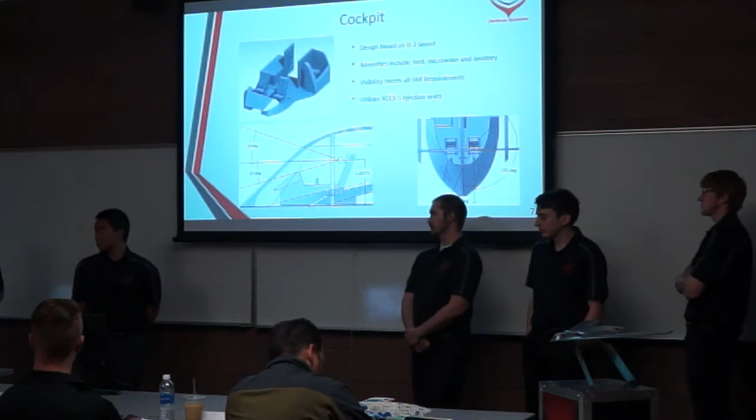I'm doing the propulsion minor, and we really haven't covered any of that stuff, so I don't really know how we would handle that - it'd be something we would have to look into. I think staying below your angle's probably going to be the answer. Yeah, but just so you know that's there, and that's something to be worried about.

On your thrust required curves - this is a little bit of a nitpick - you made the comment about the weight, I forget what it was, whether this was at full weight or something, at cruise configuration.

Okay, when you make a data chart, you will be surprised at how long it will live in the company, and how many people will lift it and use it for other things. You have to have all your configuration stuff on this chart. It's not enough to say it in words, because somebody's going to lift this chart and use it in the wrong place some other time in the future. So be careful of that, and make sure you're really explicit.

Did you do any analysis to see what your tip deflection angle would be at max Q and max deflection? Like what angle our wings would be? Yeah, so you're flying along and you deflect and the tip rotates. Oh no, I didn't do any rotational stuff. Technically the spars are loaded differently, but it's not the accurate loading, so no. It's worth looking at, because one of the things that can happen is you deflect your control surface and you get so much deflection that you get control reversal. You think you're trying to go one way, and then because of the deflection you actually get control reversal, and that's worth looking at to make sure that doesn't happen.

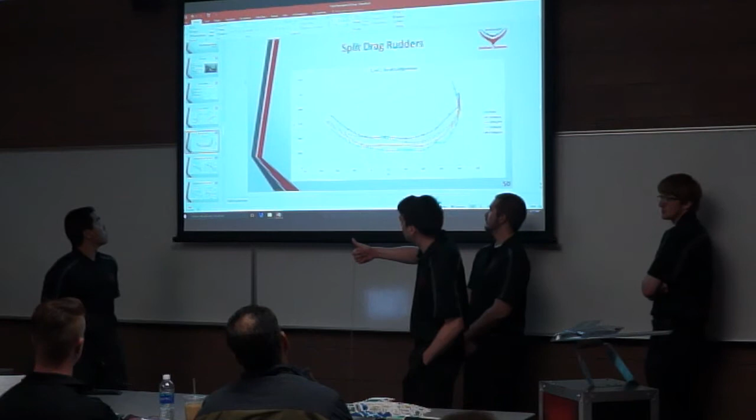Well, that's fine. So the direction of your mismatch, is that consistent with your Reynolds number difference? I would, hold up a second, but I don't know. So your Reynolds number is lower. Right, so I would expect to see those higher CL values flatten out a little bit more. As you hit that turbulent flow field you have more momentum in the flow field, you should have less separation, less drag. I tried to do the Reynolds number extrapolation on the data, which is why you see it goes from basically straight up to a more flat curve here. Yeah, but it was just not quite what is actually happening.

The CM alpha being unstable between 2 and 6 degrees was noted. Okay, so let's say that actually is the case - so what? What does that do to the flight controls engineer who's got to design the autopilot? That makes the system have to work a lot harder. Okay.

Seeing data like this is not uncommon - I've got systems that do this kind of stuff, and you get all kinds of weird things. What ends up happening is your flight controls guy has to schedule his autopilot across angle of attack - I need different gains at 2 degrees than I need at 3 degrees. The fact that it's doing that doesn't bother me, but you just need to know your autopilot guy is going to have to deal with that, and that's one of the ways you deal with it. Think of it as full employment for the controls guys. They love that. Not really.